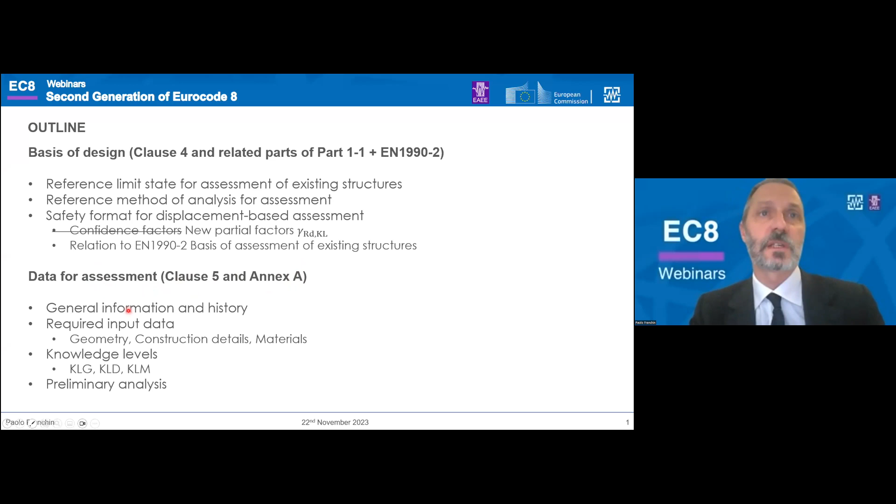Then I will move to clause 5 and Annex A, which talks about preliminary analysis used also in collecting the data, talking about data for assessment. So let me save time and keep going to the next slide.

Before doing that, this is for your record, the versions of these documents I'm making reference to when I say part 1.1, part 2, and so on. These are all inquiry versions apart from the formal vote version of part 1.1.

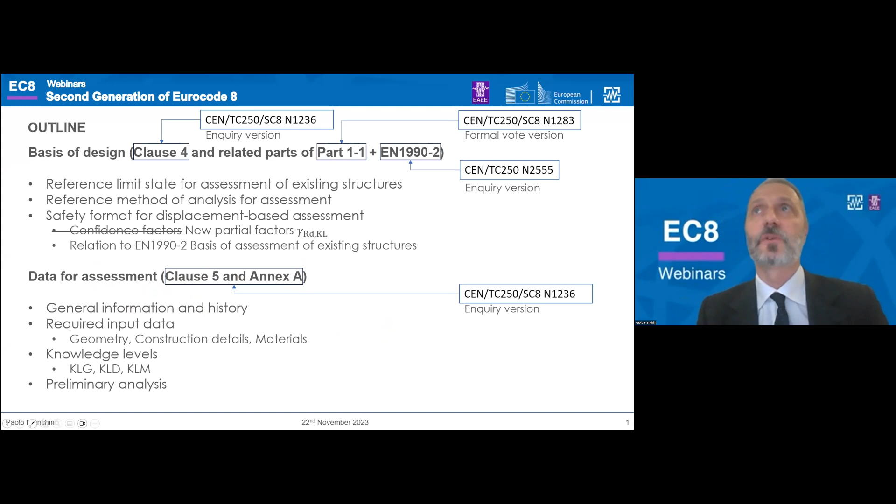Now, basis of design. Let me start by comparison with part 3 2005, the first generation part 3. In what was then clause 2 and now is clause 4, limit states and return periods were defined for the assessment case. So part 3 2005 gave its own definition of the limit states, which is kind of weird. This is one of the inconsistencies that have been removed.

Actually, since assessment is not design, which is quite obvious because we cannot rely on global ductility, the significant damage limit state, which is the one we usually check in view of safety, in lieu of the near collapse one, cannot be checked as well as it usually is as a proxy for design of new structures. So the near collapse limit state was introduced and emphasized.

Nonetheless, as you see here, in the definition of the limit state, the national authorities decide whether all 3 limit states should be checked, or 2 of them, or just one, without saying which one should be preferred.

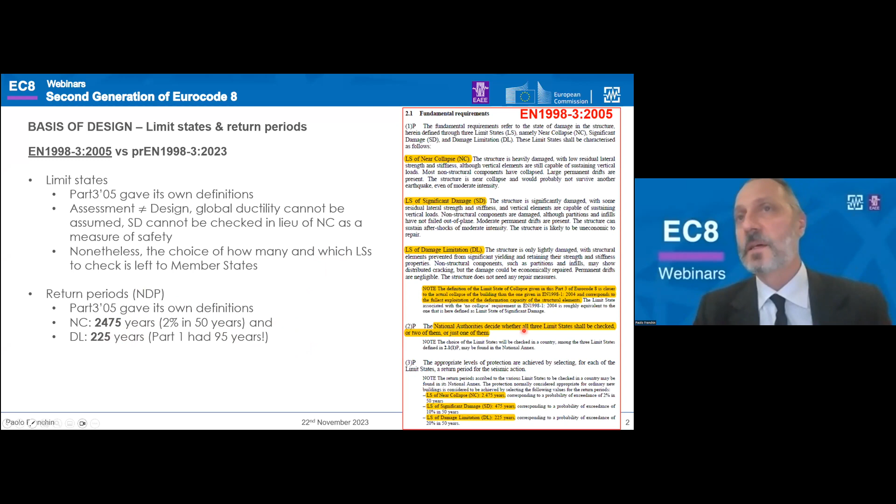Also, the return periods were defined in part 3 2005, and in particular, they were 2,475 years and 225 years respectively for the NC and the DL. The 475 years is never touched, as you know.

Now, in the new part 3 2023, all this has been eliminated. Part 3 refers to part 1.1. You see, limit states are defined in part 1.1, and the return periods are defined in part 1.1. What is it? And this is an important statement.

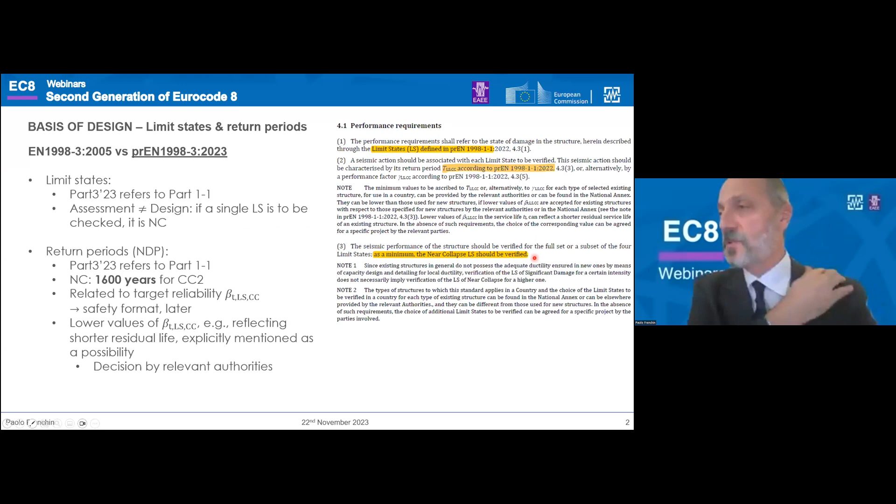If only one limit state is checked, as a minimum, the near collapse should be verified. Now, this is not a shell, so it's not a principle. There are possibilities, as Professor Kappos has already hinted at, to check SD. But in general, this is strongly encouraged because it's the limit state to be checked for existing structures. This is a change. In terms of return periods, we have to refer to part 1.1, as I said.

For consequence class 2, let's say ordinary structure, what was the importance class of ordinary structure before, the return period is 1600. It's smaller than the previous one. It's related to the target reliability, which I will talk about later.

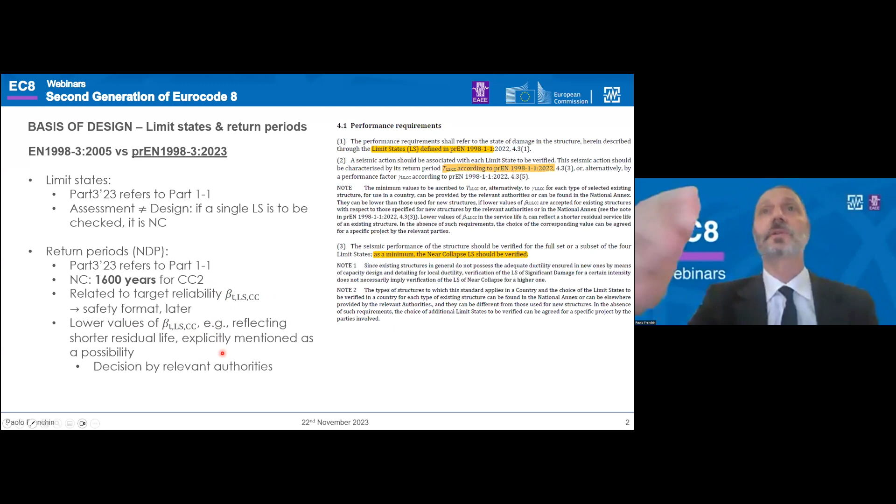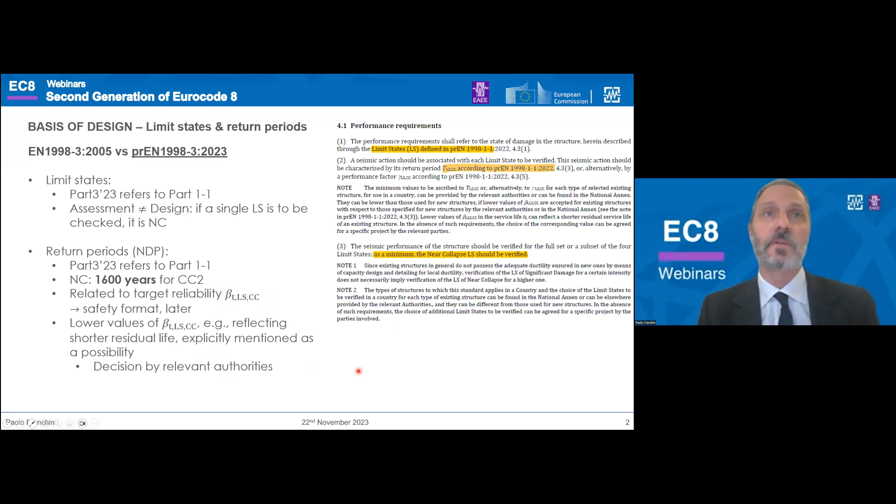This is a reliability index, a target reliability index for limit state and consequence class. There is an explicit mention of the fact that lower values of this target reliability, for instance, reflecting a shorter residual life — we want reliability rather than in 50 years in fewer years — is an explicit possibility, a decision by the relevant authorities. So you can differentiate reliability of existing structures with respect to those of new structures.

So what type of analysis should be carried out? In general, not the force-based approach. This is immediately ruled out, let's say as a limited exception, because Q values for the near collapse limit state, which is the reference limit state, are not available.

In general, the ductility of existing structures is not even enough to support the Q values for significant damage. So it is permitted, but with Q values given in this part, part 3, that are lower than those for new structures. And the intensity, bear in mind, is the near collapse intensity, so for 1600 years rather than 475 years.

So it's larger. When is this going to work and give a positive outcome? Possibly in low, maybe in moderate seismic action class, which is where it is permitted. If you find a positive outcome, this is okay.

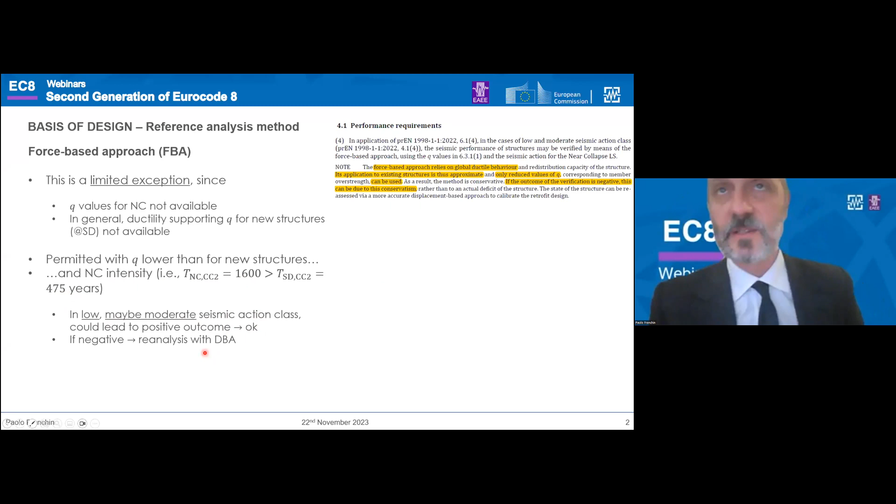If it's negative, this doesn't mean that the structure is damned, is going to not perform. It may still be compliant, but you have to reanalyze with the displacement-based approach, which is the general method.

It was put forward as, let's say, an attempt in part 3.05. Now it's possible also for design for all types of structures and geotechnical systems. You find the displacement-based approach, let's say, at parity of standing with the force-based approach in all parts from 1.1 to 5. It's based on nonlinear analysis, usually static, and deformation checks, with force checks for brittle elements.

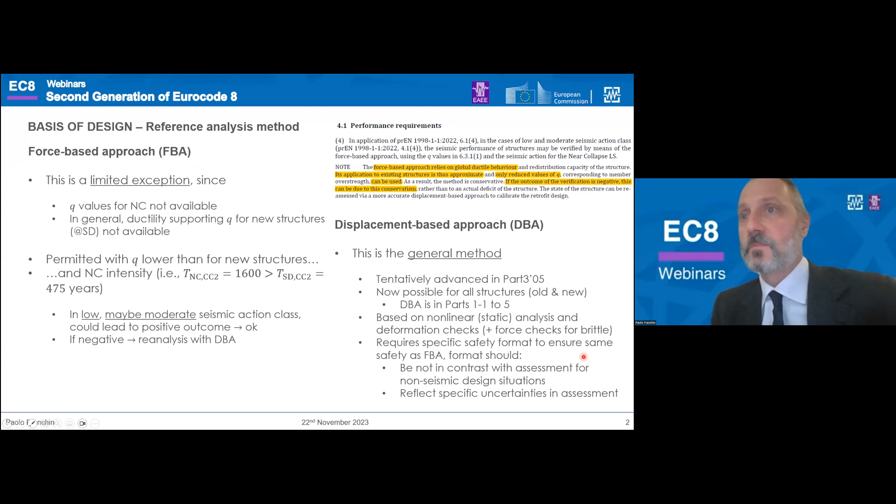Of course, you need to have the same safety resulting from the design with the DBA, or assessment with DBA, as that which you will have with the force-based approach. So this meant that the safety format needed to be reassessed.

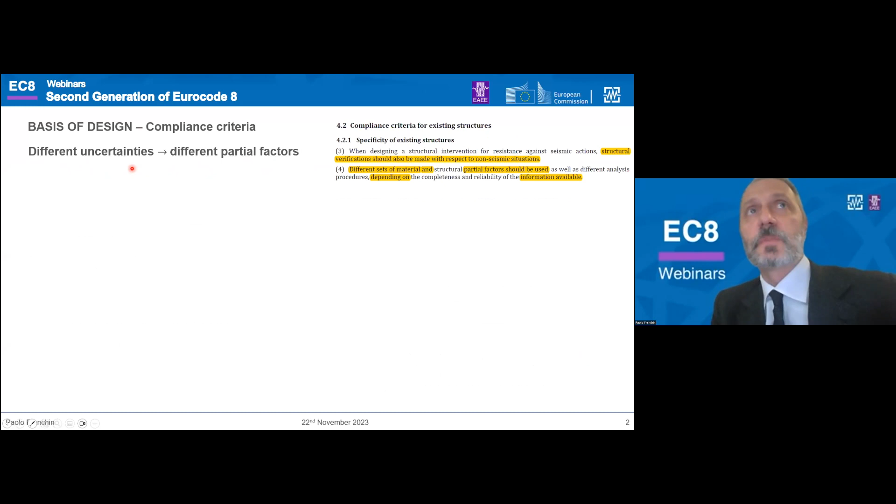So in this safety format, of course, enters into the checking of compliance, performing verifications. Talking about compliance criteria: the first thing that is said is that existing structures have their own specificity, and they can have different uncertainty with respect to new ones. So it means that you can use different partial factors.

Going to verification rules, of course, different partial factors means that the reference method is, as usual, the partial factors method. But there is one new item which is quite relevant — it's not going to be used often, but it is a novelty. Annex E — actually not F, as in the version I'm referring to, it has a new number.

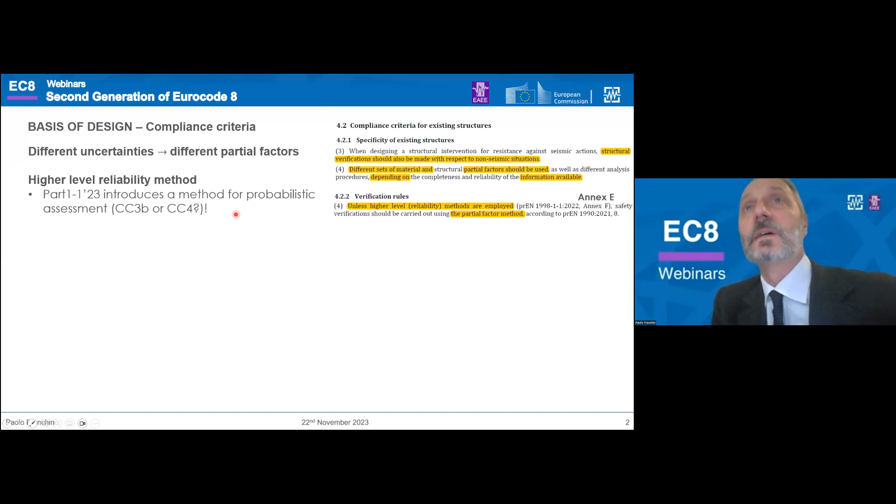Annex E of part 1.1 introduces a higher level reliability method, an explicitly probabilistic method for checking safety. It is not foreseen to be used in 99% of cases, but maybe for a class CC3b structure, it could be an option.

Everything else will be done with the partial factor method, and we have to compare design value of action effects with design values of resistances. Now, focusing on the first one, this factor is something new — well, not new, it's in the formulation of EN 1990, but the way it is used here is important.

It is for those cases where you have uncertainty in the modeling of the structure related to, for instance, damage due to an earthquake. When you are assessing the structure to retrofit it because it has been damaged in an earthquake, you may not be able to—of course, if damage is very heavy, it's easy. But if damage is not that heavy, understanding how much the capacity, the resistance, has been reduced might be difficult. So also the response is difficult to assess, and you have to amplify response with this gamma SD.

In all other cases, whenever you carry out assessment just because you want to improve your structure, and there is funding for doing that, gamma SD will be 1. For resistance, you have the usual expression from Eurocode 0, but you don't have the previous, let's say, uncalibrated combination of confidence factor and material partial factors.

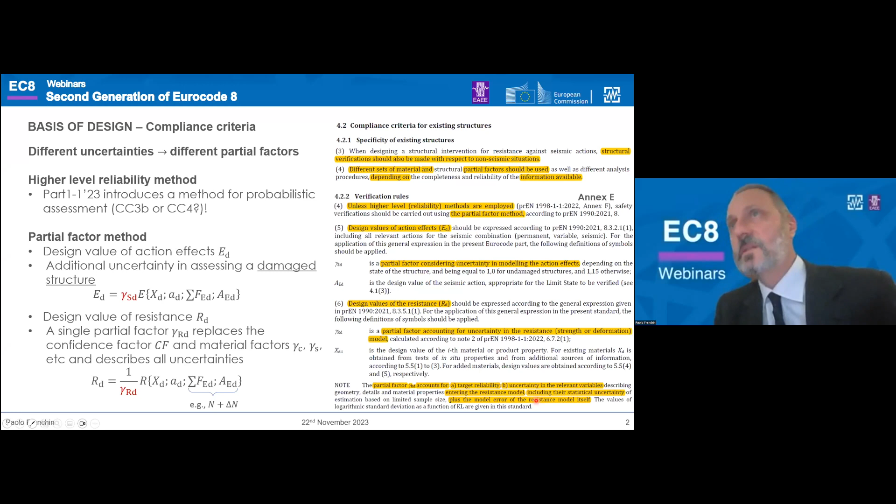You have just a single partial factor on resistance, called gamma RD outside, that divides the resistance. This factor accounts for all uncertainty in the problem, meaning the target reliability, the uncertainty in relevant variables like those that enter into the resistance model, including statistical uncertainty, because they are usually estimated based on a limited sample size in existing structures, plus the model error, very important, of the resistance model itself, which is, I can anticipate, the largest contributor to total uncertainty.

So we will focus from now on the resistance side, which is where we have this gamma RD factor. Let's go to representative values of material properties. For existing materials of the existing structure, this is very important. The properties, let's say material or product properties, have to be taken as the mean.

This is also different from what used to be done in Part 3 '05, as you see. It's not the mean divided by a confidence factor and a partial factor. It's really just the mean. And these are the mean from tests of materials, for instance carried out at the time of assessment, and other sources of information. Let me make a comment about this now.

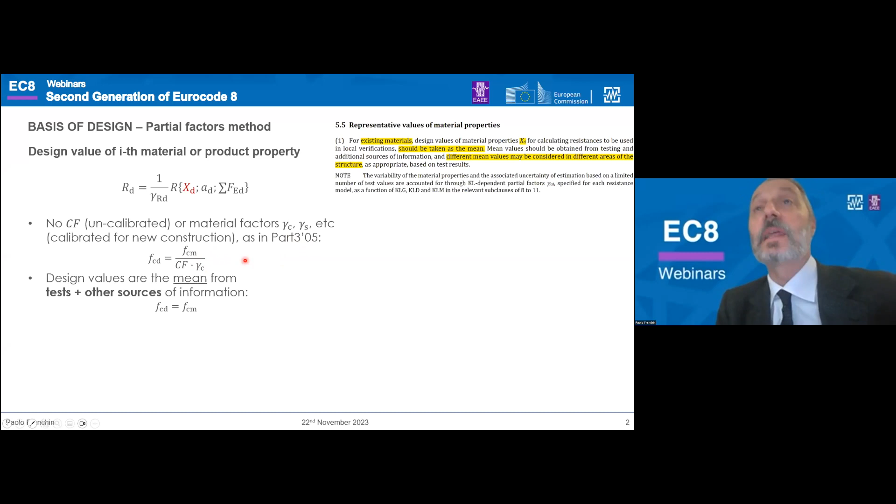For instance, you are assessing a structure that has maybe 50 years of age, and you have original design documentation, not design specifications but, as I'll show with some examples soon, tests carried out at the time of construction. Those tests report resistance from 50 years ago. You should take care in bringing them to current time when you combine them or compare them with the results of tests carried out now, because there is evolution over time.

This is not said explicitly in the code, but it's a general good rule in assessment. So yes, you have to take the mean, but the mean is the mean of values that first need to be made homogeneous. This is just a relation from the FIB Model Code, which tells you how to do that for concrete strength.

This is a very important step forward, because the same values of material properties go into the verifications, into the formulas for resistance, and into the model. The model is not just linear elastic, it's a nonlinear model, and it requires resistances. You don't need to compute the resistances twice: you compute them for verification, where you divide them by gamma to account for uncertainty, and you put them in the model.

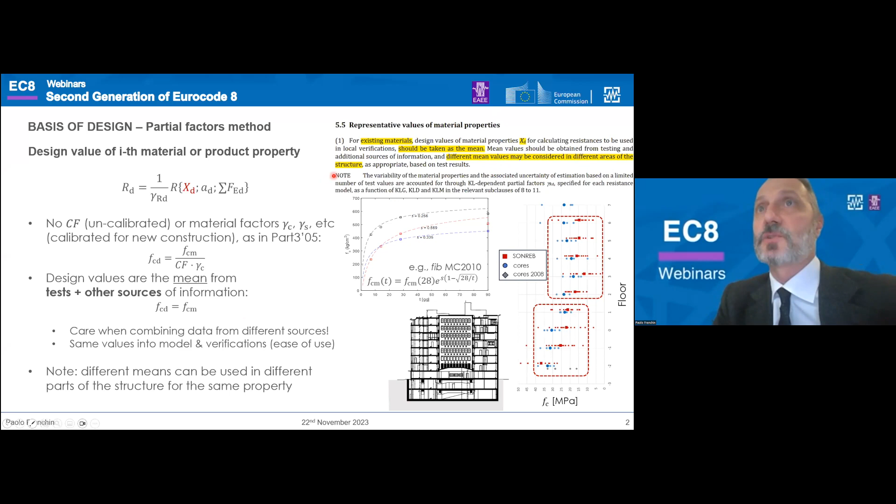This is, of course, less error prone and goes towards ease of use. The second thing that this text says is that different mean values may be used in different areas of the structure. This is very important because before you could not do that, but it is often the case.

Structures are cast in sequences - I'm always referring to reinforced concrete because I'm more used to it, but this also applies to other materials where you can have different homogeneous portions. You can identify different homogeneous portions in the structure, maybe through non-destructive testing, and then assign different mean values to the material properties in different portions of the structure. This is also something that came out of applications and is very important.

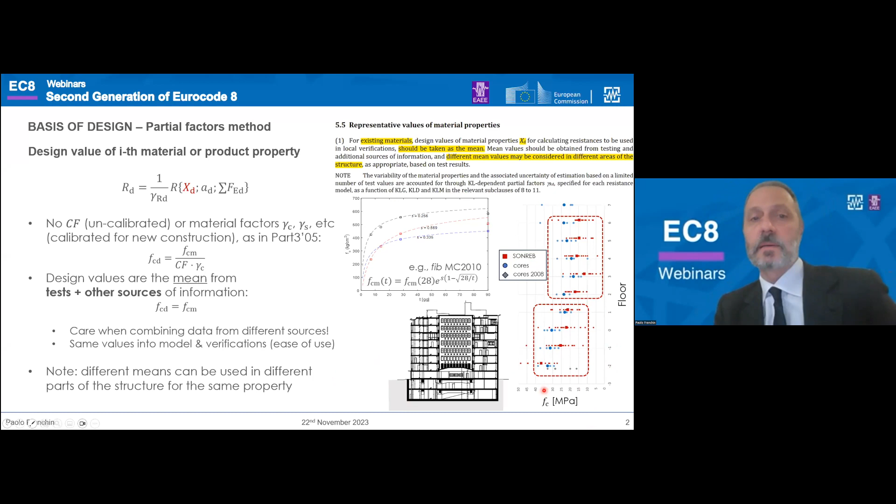Look also at the relatively good relation between non-destructive testing, in this case SonReb test, and destructive testing. This is important for material testing, which I'm going to talk about soon.

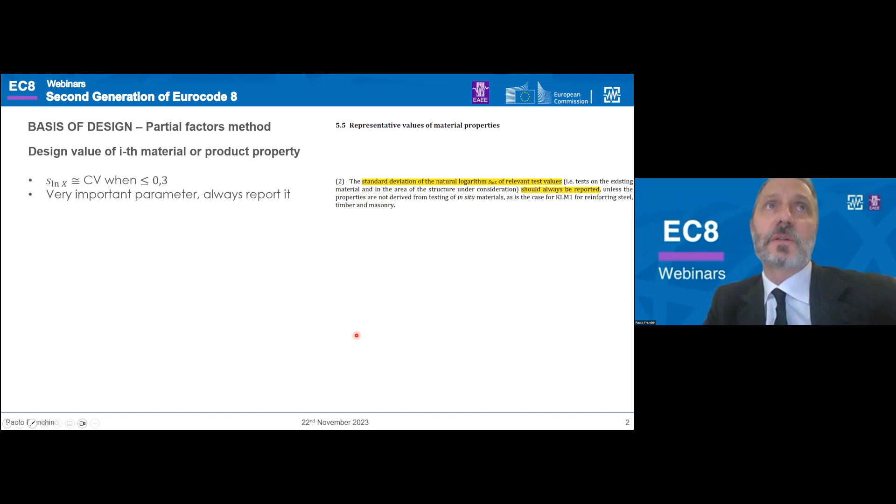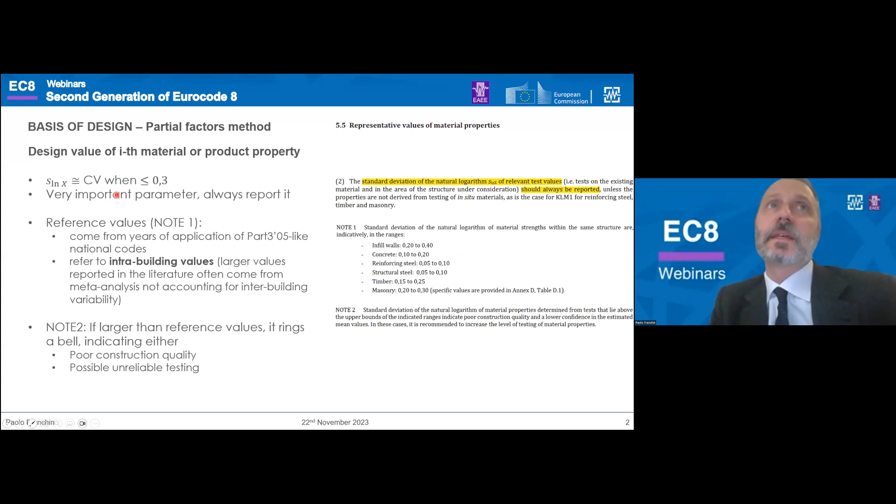One important thing you have to do is that when you carry out tests, you also have to compute the coefficient of variation of these tests, for instance values of concrete strength, steel strength, and report it. This is important because it's easy to do, just computing a coefficient of variation, but it allows you to compare with values from a lot of applications of the previous code or similar national codes, and this Part 3 '05-like national codes. This is important because if the coefficient of variation that you find is very large, larger than the reference values, this may ring a bell and tell you there's something wrong.

Either testing is unreliable, so repeat it and check better, or this is an index of poor construction quality. So take extra care. This is said explicitly now.

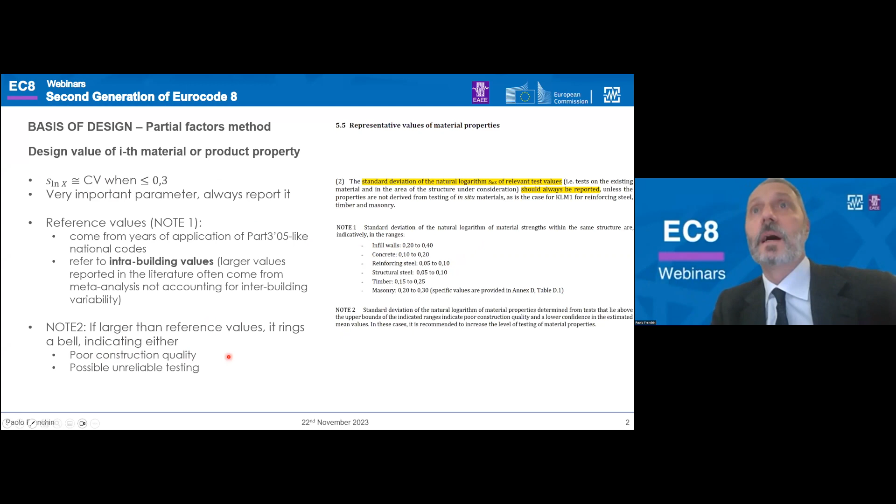Now going back to materials, materials are divided into 3 categories: existing, added, and new. Both added and new are new material, something you add to the structure. But the distinction is important: added material is new material used in retrofitting a member, like the concrete in a reinforced concrete jacket around the member, while new material is used in a new member, like the steel in an exoskeleton.

Basically, in all cases, you can use, or you should use, the mean as a representative value for existing material, as we have seen in the previous slide, for added materials, and even for new materials when they are used to build members that work in parallel with the structure.

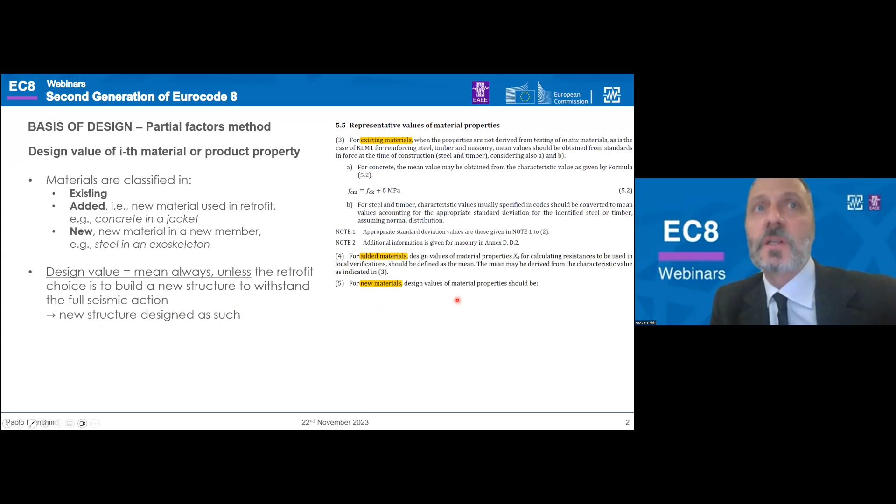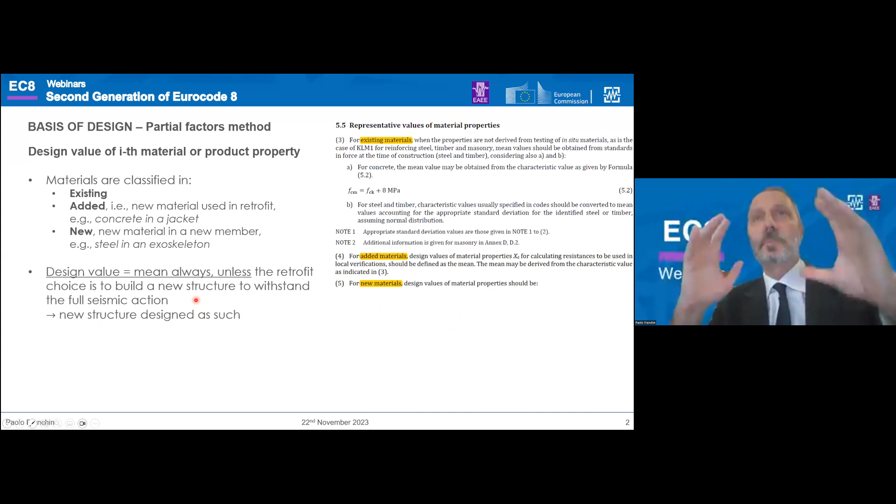There is one exception, which is the one I'm showing here. Something is missing here, sorry. You use the usual characteristic values for the material to make your verification when the new structure is built in parallel to the existing structure and is meant to carry the entire seismic action. In that case, what you're doing is building a new structure and checking it as a new structure, applying part 1.1 and the other parts.

Professor Kappos already said this. The mean is used almost ubiquitously here, and this goes along with nonlinear analysis, because as long as the analysis is nonlinear, this gives you an unbiased estimate of response. It's better to use the mean.

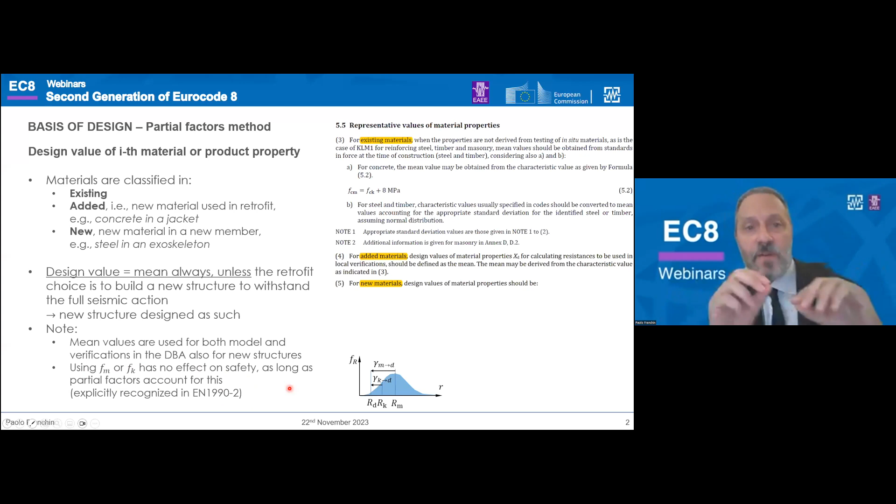This was an aspect that took us a lot of time in the interaction with EN 1990-2, because it said explicitly that using the mean or the characteristic value as a representative value of a property in the verifications has no effect on safety. They are both equally valid choices. This is recognized now, since what counts, what matters, is the design value.

If you use the characteristic value, the lower fractile, you will divide it by a given partial factor. If you use a mean value, you will divide it by a different, usually larger, partial factor. So as long as the partial factor accounts for the fact that you use the mean, and I can tell you part 3 has partial factors that account for this, then there is no effect on safety. No problem with that. Of course, you can come up with partial factors that are larger.

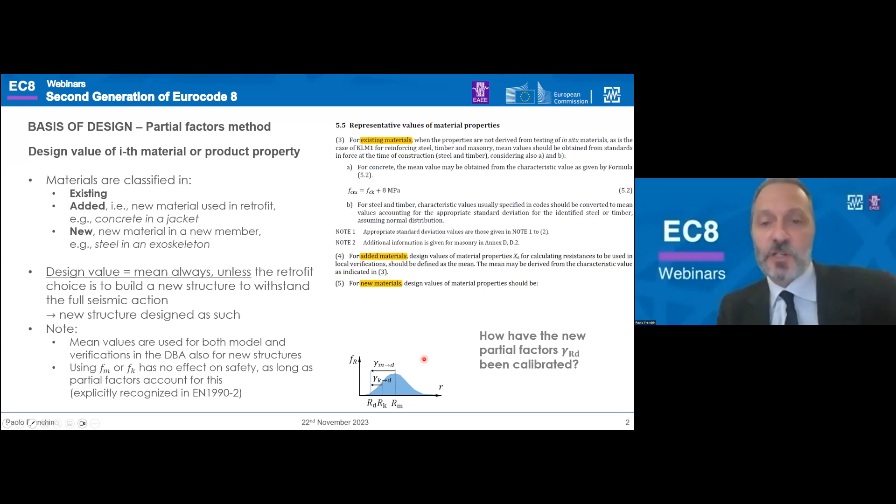So the last important point is how these partial factors have been calibrated. Calibration of partial factors is an optimization problem. This is just for reference for you; this is not what has been done in the Eurocode.

Usually, what you do is choose a set of partial factors, consider a number of design cases, and evaluate, given the partial factors, what the resistance of the structure is through the design equation. You can compute, given effect and resistance, the reliability of that design and see whether it is far from the target reliability. You sum up all the deviations from this target and repeat until you minimize and find the partial factors that minimize the discrepancy between reliability of the structures and target reliability for all design cases.

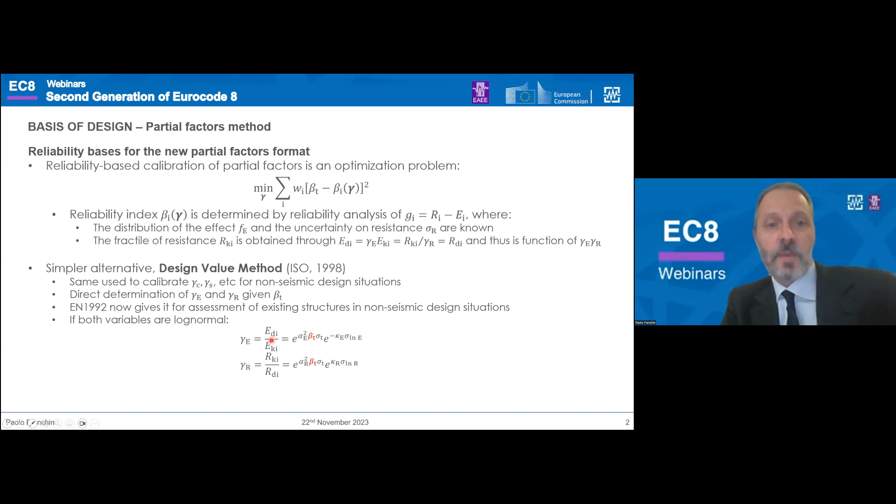So the Eurocode uses a simpler alternative, called the design value method. This was also used in the older Eurocodes, but not explicitly; you only got the results, for instance gamma C equal 1.5, gamma S equal 1.15, and so on. They were calibrated with this design value method, which has a closed form for the partial factors as a function of the target reliability, beta T, and other things.

So now, the problem of calibrating new partial factors for the case of assessment is not just a part 3 of Eurocode 8 problem, it's also the problem of other non-seismic design situations where you need to carry out assessment.

Eurocode 2 for concrete, in an annex, gives this method, this expression for the partial factors, which is the same used in the case of Eurocode 8. So this is the new format of the partial factors.

In this format, you have these coefficients, called alpha E and alpha R. These are the sensitivity to the load and the sensitivity to the resistance, which are a function of the uncertainty in load and resistance. Now, uncertainty in load and resistance changes from case to case.

The reason why this method was used in the Eurocodes is that in 1982, Professor Koenig and Hosser came out with these, famous values for alpha E and alpha R, for non-seismic design situations. Many of you that deal with assessment might know these values.

What we did during the process of revising Part 3 was to come up with new values specific for the seismic case. These values are different because the weight of the seismic action with respect to the resistance in the seismic case is different from that in non-seismic design situations.

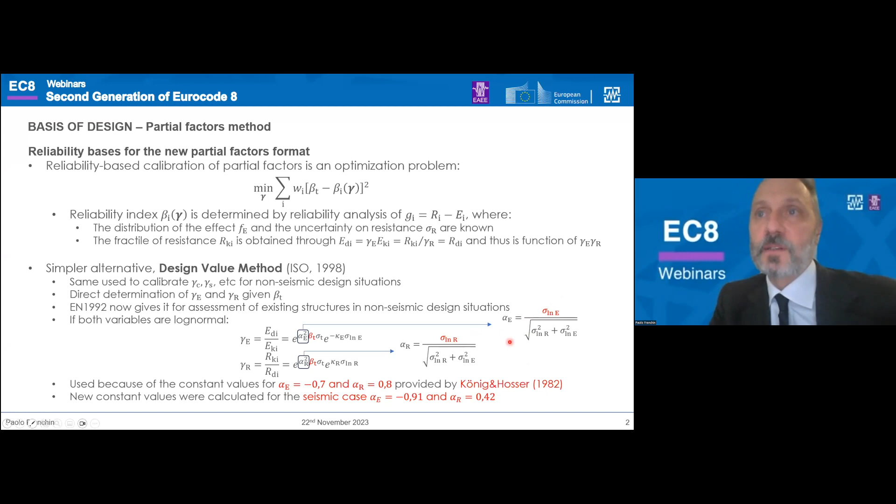In particular, in the seismic case, the action effect is more important than the resistance. So there were some seismic-specific developments.

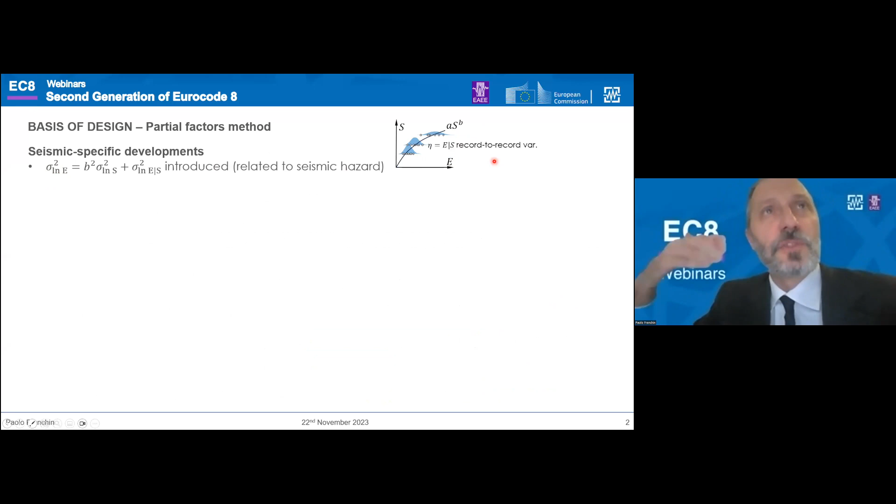These are just for documentation. If you see the slides, the PDFs, this is the uncertainty in the action, and it accounts also for record-to-record variability, all things that are now, by quite a few years, well known.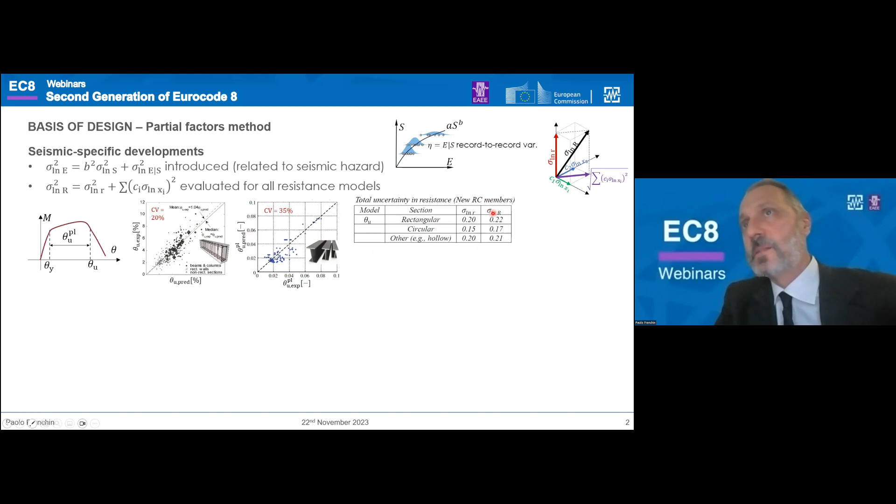You know the models - well, they have different coefficients of variation. These coefficients of variation are reported here, and you see that they are so large that they dominate the total uncertainty, which also accounts for the uncertainty in the input variables to these models.

I'm not showing the expression here. There is a representation on concrete later.

A final important thing to know is that since Eurocode 8 does not use a partial factor on the load side to amplify the seismic action effect, all this has been turned into a single partial factor format, with a value of 0.85 that accounts for uncertainty on both sides.

You need the target reliability, and the target reliability is given in Annex E of Part 1.1. These are target reliability indices over 50 years. I'm not going into how these were derived - this is something from Part 1.1.

I'm not saying how these were derived. This is something from Part 1.1.

If you consider, for instance, consequence class 2 and near collapse, and theta ultimate, you come up with something like this. These are values for new RC members.

Please note, I'm not showing values for existing members because this may change during the process of replying to the inquiry phase, so they are not final, while those in Part 1.1 are already final.

So these are the values for new structures. For an existing structure, gamma D depends on the knowledge level.

This is already the terminology used in Part 1, in Part 3, 2005, and it will be larger than 1.55 in this example for a similar reinforced concrete member.

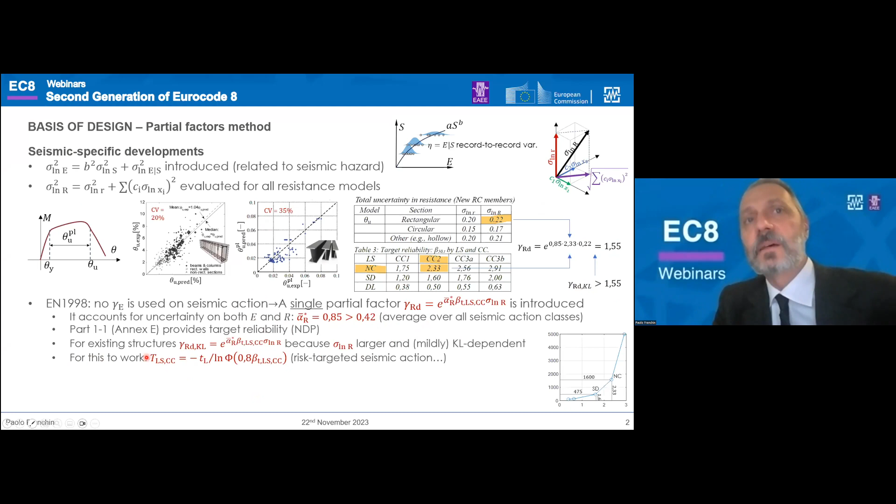There is a trick for this to work. To use just one factor and eliminate the second - so you have no gamma E, gamma R, but just one gamma Rd - you basically need to target the return period of the seismic action to the target reliability.

So this is what people in research are calling risk-targeted seismic action.

This is exactly what is in the Eurocode now. This is for part 1.1, but it's used in here, so you need to know that. And these are the return periods, and these return periods correspond to this target reliability.

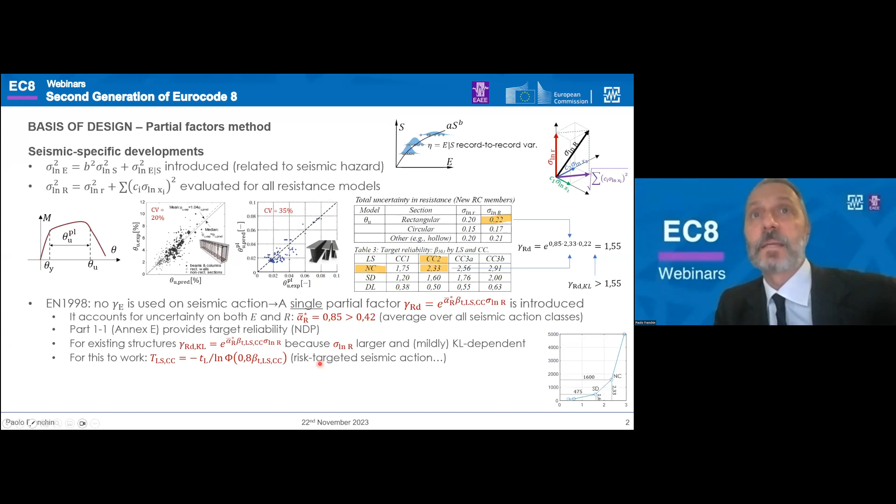Now, I see that I'm left with very little time here, so I apologize. I will talk quickly about sources of data for assessment. Now, there are two types of sources: structure-specific information and relevant generic data sources.

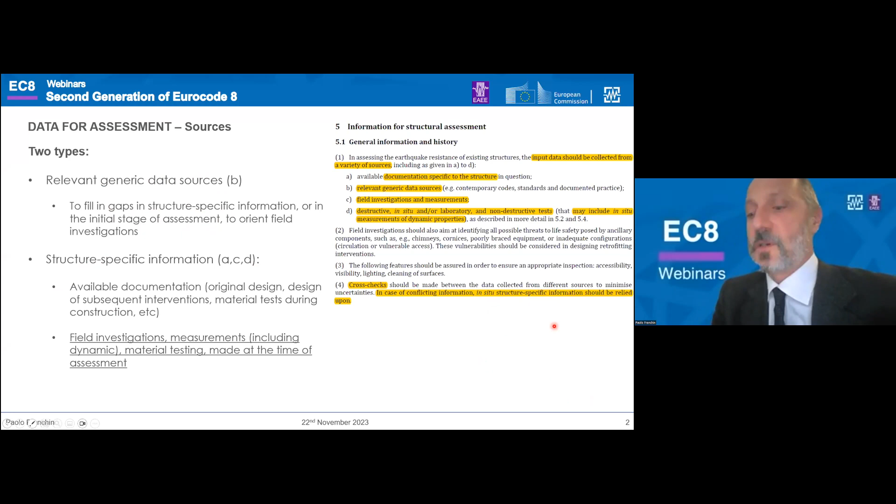Relevant generic data sources may provide very useful information, especially in an initial phase where you need to fill in information that you still don't have. In case of conflicts, of course, structure-specific information is always the one to be relied upon.

The data are listed in 5.2, the data you need to get for your structure. But one specific aspect that is very important is the history of the structure. This is usually considered very important for historical structures, like heritage structures, but also for structures in reinforced concrete, for instance, because they may have gone under changes.

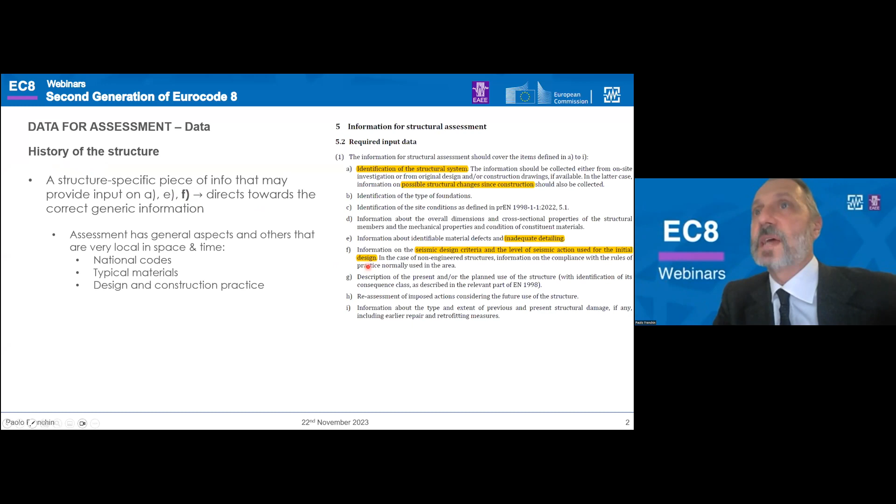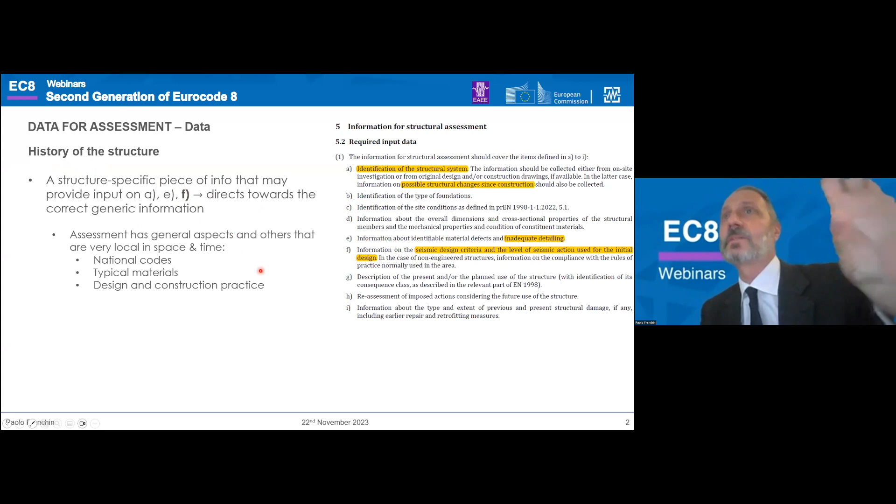And these provide information, especially about seismic design criteria and the level of seismic action used for the initial design. So this type of information, where to go to look for generic but relevant data sources, is a matter of knowing the history of the structure.

So I'm over time from now on, I will go even faster. This is an example from a paper studied here of relevant generic data sources in terms of design procedures, material properties for Italian reinforced concrete structures.

And what I want to say here is that this information is very local in space and time. So you need to know in every decade or so what was the code, what were the materials, and in each area - Germany, France, Portugal, Greece, Italy - it will be different.

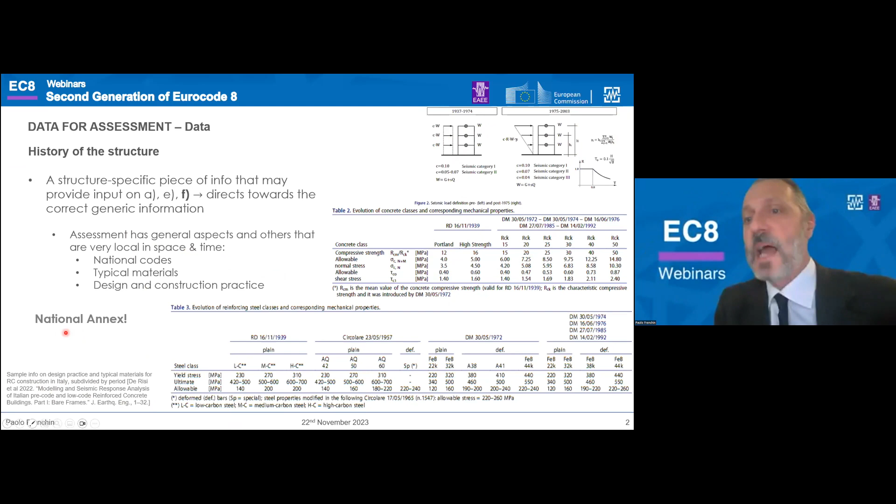So these ideally will go into the national annexes. This is work for the NSB, National Standardization Bodies.

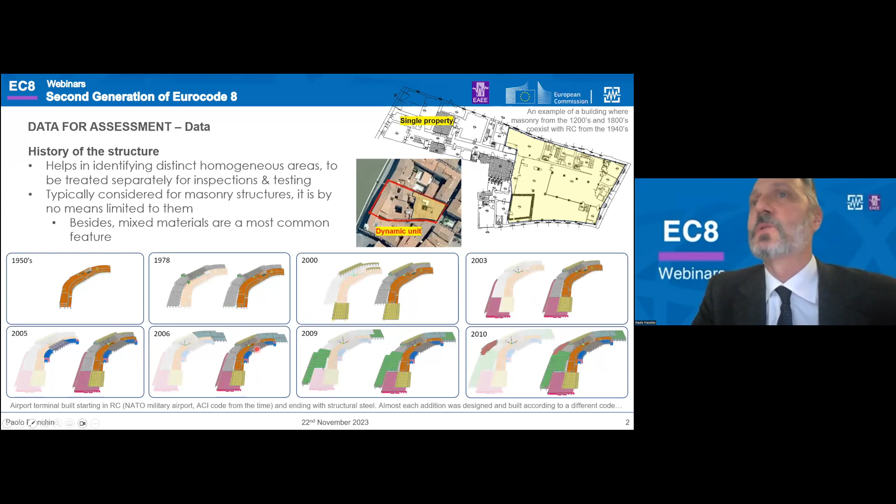So all this information goes into boxes, which are geometry, details, and materials. And these are the same as in part 3.

What is different, but Professor Kappos already said that, is that now you don't have a unique knowledge level, but you have a knowledge level for geometry, one for construction details, and one for materials. Each with its own distinct level, and each with its own distinct level in different portions of the structure.

The concept here is very important: having a lot of information on a portion of the structure that does not really change the result of the assessment is useless. For instance, if your structure is going to develop a first soft story, you should not investigate or spend energy or do invasive testing in areas of the structure that do not matter for the final outcome.

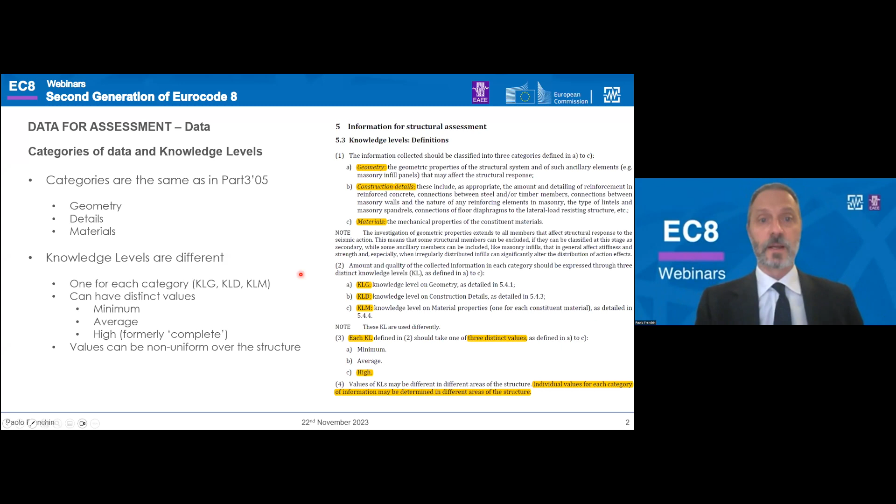And this is now possible, which was not possible before. So, for instance, for geometry, you need to use structural drawings rather than architectural drawings, so you need a survey if you don't have the drawings. You have this general kind of table to establish what is the knowledge level in geometry that you reach.

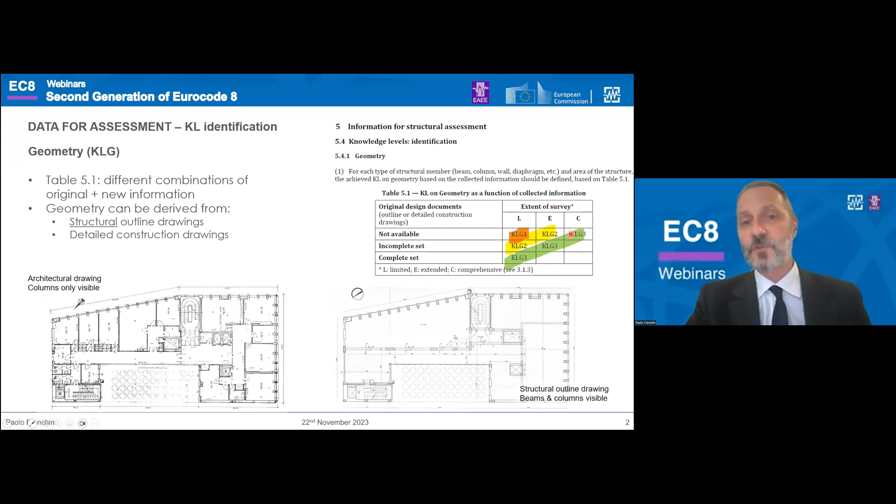And you see, you reach the maximum level, which is called high. It's not called complete as before because it's never complete, it's called high. KLG3, if you have the complete set of drawings and you still perform a limited check on consistency of the drawings with reality, or you have an incomplete set but you do an extensive survey, or you don't have drawings but you do a comprehensive survey.

It's not moving. This I can skip.

What do we mean by limited, extended, or comprehensive survey? It is the percentage of elements P that you are going to investigate per each element type.

This percentage is given by a formula, and it's a change with respect to before—these percentages are no longer fixed. They depend on structure size, and they decrease with structure size. This is important because saying 20% on a very large structure means a lot of test inspections that are not really useful. You get good knowledge with maybe a few tens of elements; you don't need 100. But with large structures, this was a problem.

So now, this is the number of tests you need—elements you need to inspect, M, percentage times N, with N increasing. You see that the number of elements you need to inspect is always lower than the one you needed before.

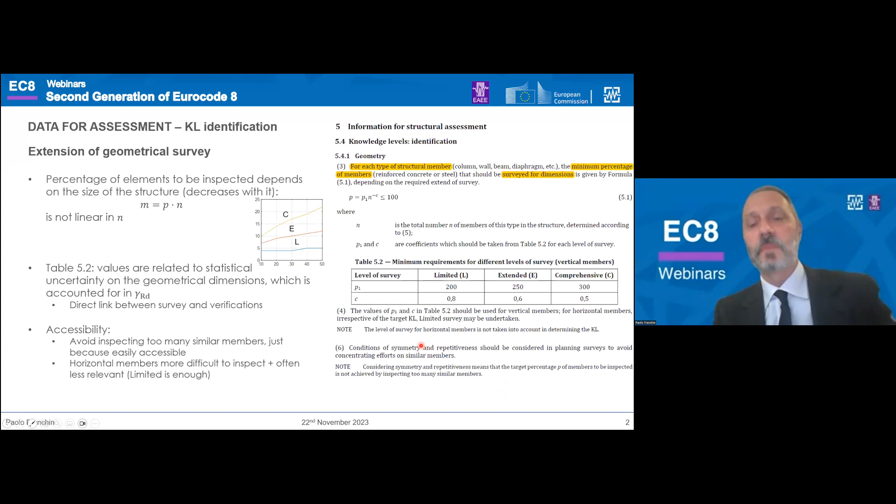Of course, you need to be smart and also serious, and not exploit symmetry or other conditions like accessibility. You may have an easily accessible set of members, but they are all the same because of the design, and you can tell that. So you don't want to inspect those just to satisfy your percentage requirement. You need to inspect different elements in different positions, so that you can extend those and maybe go beyond these percentages. So this is a warning that is very important.

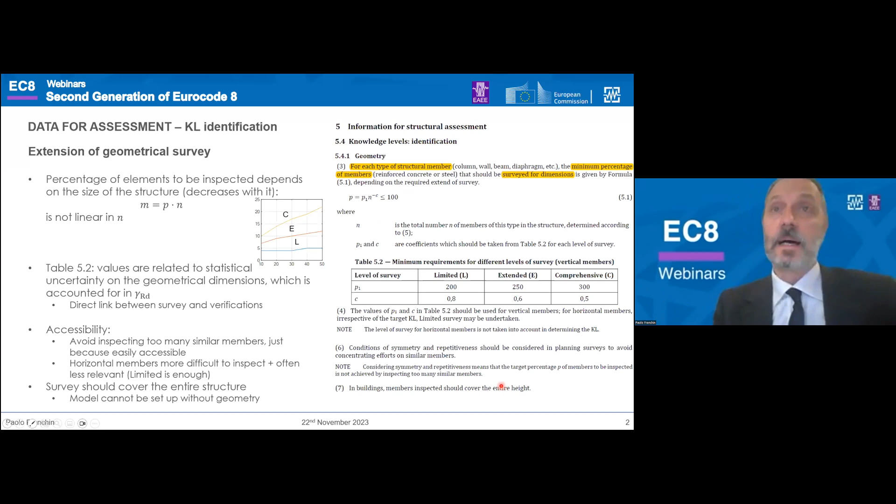Preliminary analysis is carried out after. It's not mandatory, it's encouraged. It's a displacement-based analysis with nominal properties, and you will go and see that.

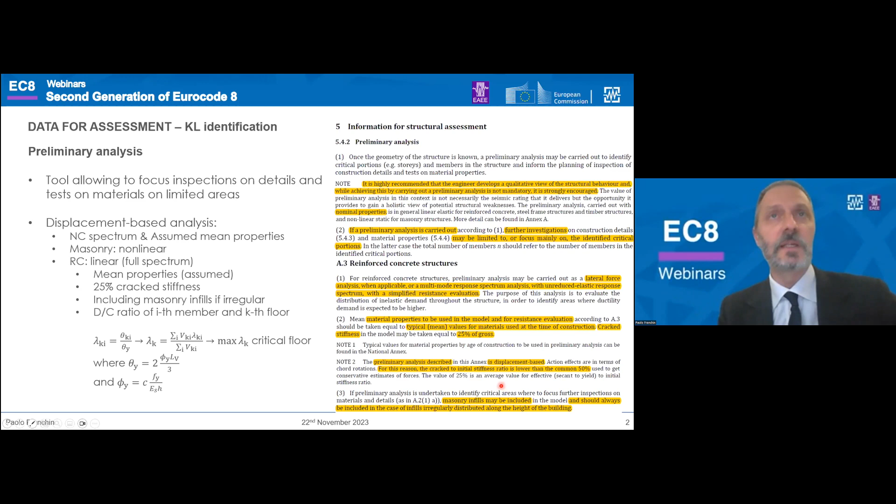Let me just do a comment, and I'm sorry because I'm late, I cannot stay more on this. The idea here is that with the preliminary analysis you can set up a model just with geometry by assuming properties, and estimate in a simplified way the capacities. You identify areas where the demand is going to be larger in relation to the capacity. These are the areas where, if you carry out this analysis, you can focus your tests, reducing the overall effort of inspections and testing the structure.

So this code now trades part of the destructive testing with a larger proportion of non-destructive testing, in order to reduce the invasiveness of the test carried out on the structure.

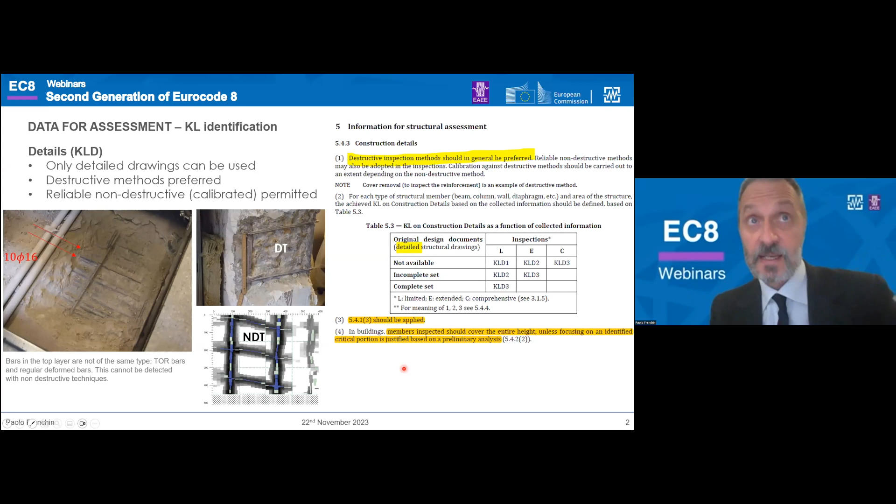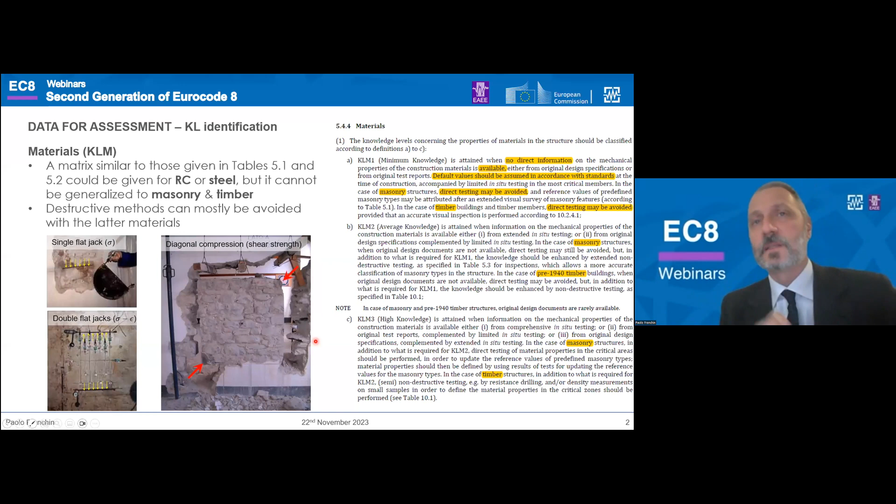I'm just showing material-specific provisions for reinforced concrete, but since there is a presentation on this later, I will just limit to this comment.

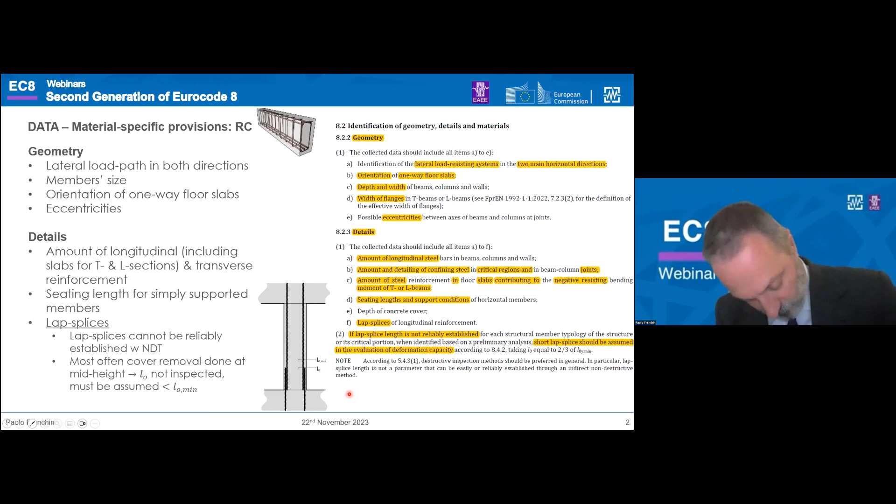One thing that you cannot see with non-destructive testing is lap splices, because you won't be able to see the length of the lap splices—Professor Kappos has already shown it. This is reflected in the models of deformation capacity, where if you don't know the lap splice length, you are forced to presume it is lower than needed, and you need to use a deformation capacity that is affected negatively, detrimentally, by overlap length.

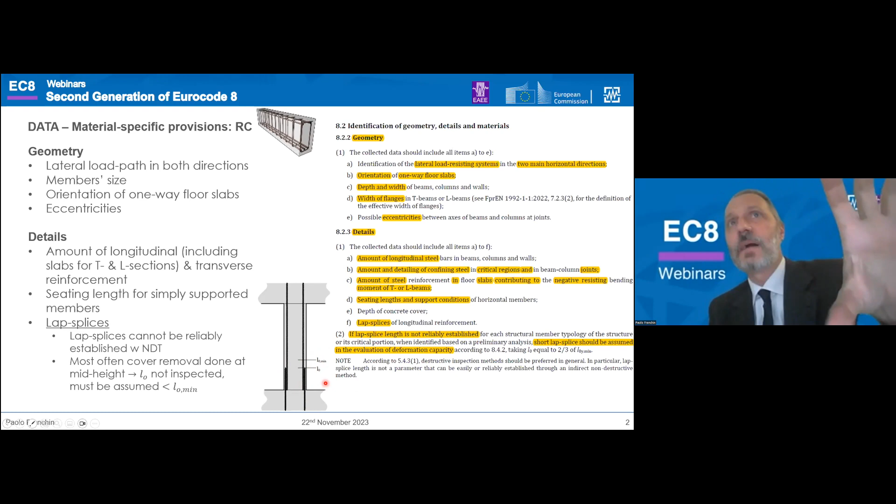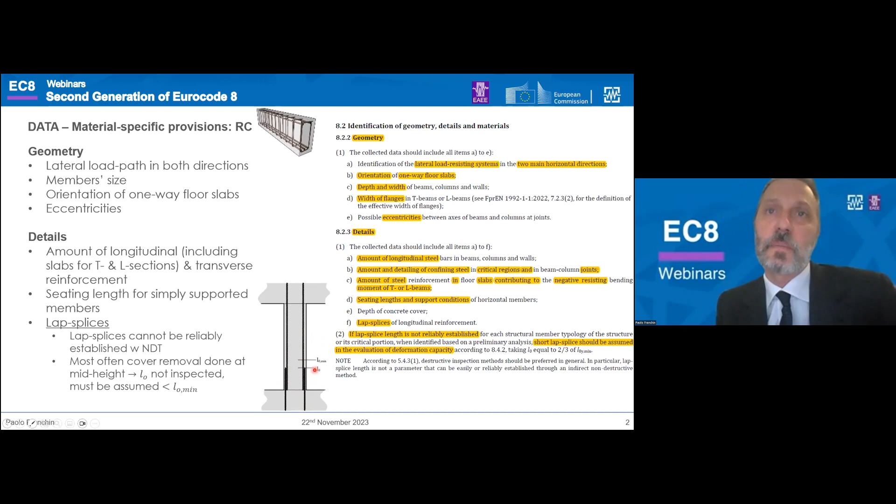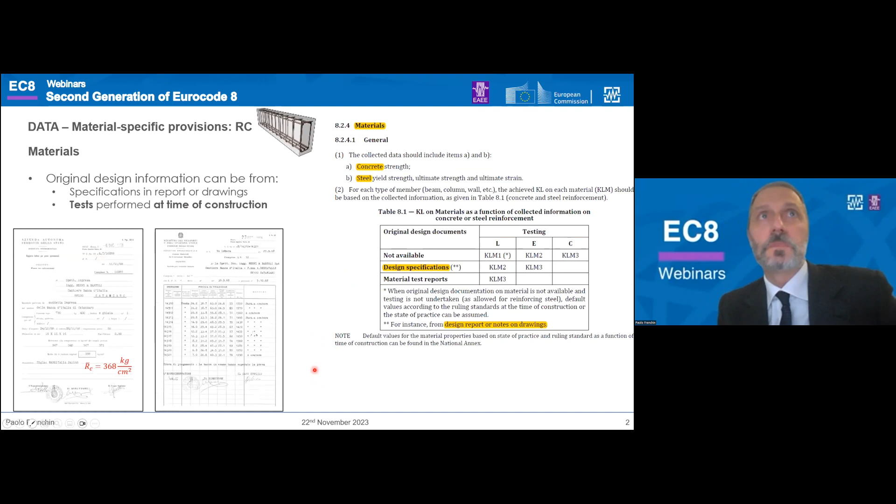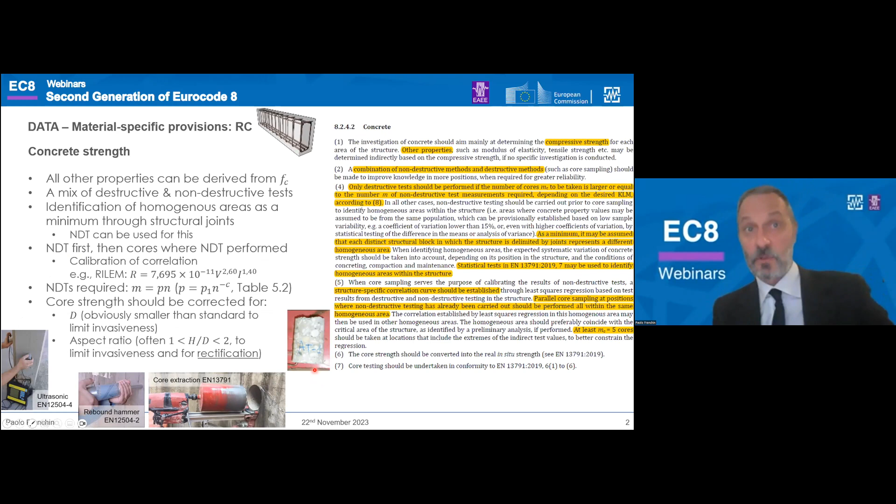Rita, I think I can go quick here. This is not needed because it's really material specific provisions, something that will be talked about by a colleague later. I apologize, it took me too much time on this. So let me go to the conclusions, you will see the PDF on this.

Near collapse limit state is strongly encouraged, almost mandatory. The return period is linked to target reliability, 1600 years, not 2500 like before. The reference method for analysis is displacement based, meaning nonlinear static analysis. Mean values are used everywhere for both the model and the verifications.

And there is a single partial factor, gamma RD, that depends on the knowledge levels. The knowledge levels are three distinct ones for geometry, details, and materials. It is possible to achieve good knowledge levels in specific parts of the structure if you focus the test there, limiting the effort somewhere else, based on preliminary analysis, which is a simplified newly introduced analysis that helps you.

identify this area. Destructive tests are limited, and there is a preference for a larger proportion of non-destructive testing. Finally, the total number of survey sections, details, and materials tested increases less than linearly with the structure size, with the new formula for the percentages of test.

I'm very sorry for having gone over time, and I stop here. Thank you very much, Paolo.

Although we are 15 minutes behind schedule, I think we will still take one question so that at least we have some interaction with the audience. I will choose a question that was raised by two of the listeners: João André from the National Laboratory of Civil Engineering in Portugal, and Ciro Canditone from the University of Naples in Italy. Their question is: will Eurocode provide modeling guidance on which material models to use and how to determine their parameters, discretization and type of elements, or numerical algorithms and sensitivity analysis? They believe this is very important given the emphasis on nonlinear analysis.

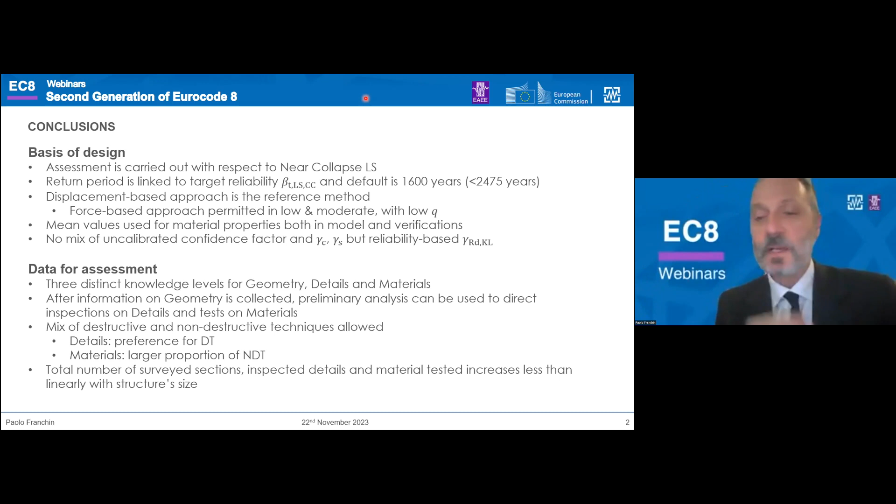This is also the reason, Ricardo, why for instance it is more important to achieve a KL in order to use a different model. For instance, if you do not uncover the overlap length and do not check it, you are forced to use another model. It's not really what makes the difference, the gamma that you put on the model, because it's the model itself that is the penalty for you. Of course.